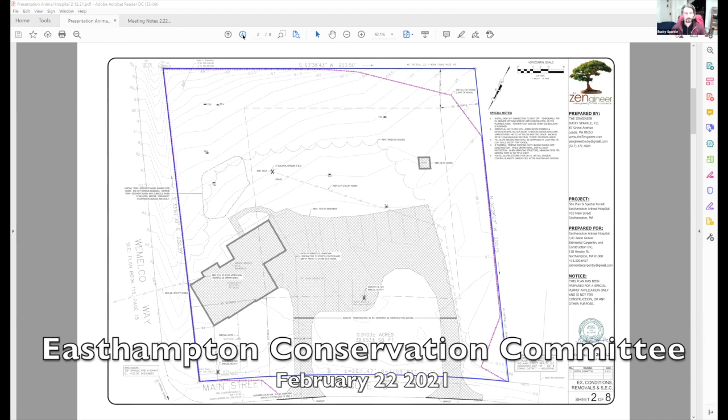There are a couple of stormwater structures. There's an existing structure here and an existing structure here that presumably tie into the municipal system. We are disconnecting those and tying everything into our stormwater management system. So those untreated discharges are being eliminated. And everything that's in the hatched shading is going to be removed from the site. So the old building is going to go once the new hospital's in place. And I'm going to move now to the proposed conditions site plan.

So obviously I put a little more coloring work into the proposed conditions, and the old hospital is gone. There'll be a new hospital about 3,300 square feet in the corner of the site. Strangely, north is to the bottom left corner on this drawing. That was not my convention, so I may just say top and left and right for simplicity, because everything will be northeast or southwest otherwise.

The new parking area, we are expanding the parking area. We're adding about 8,000 square feet of impervious area to the property. And it's all going to sheet flow to a low point right here. And that will then go through a rain guardian turret. So it's sort of like a curb inlet that has a sump and a screen and filter on it. It collects quite a bit of total suspended solids.

The company says 80%, but I looked at their documentation and I don't trust it over 60%. So I only qualified it as 60% TSS removal. We have a sediment forebay and then an overflow into the larger basin. Still not very big. These things are about 1.5 feet deep. The larger basin is also an infiltration basin now that we've done the pre-treatment. We also have an underdrain because the soils aren't particularly good through here. So I want to make sure that over time the forebay does drain out and we don't have standing water.

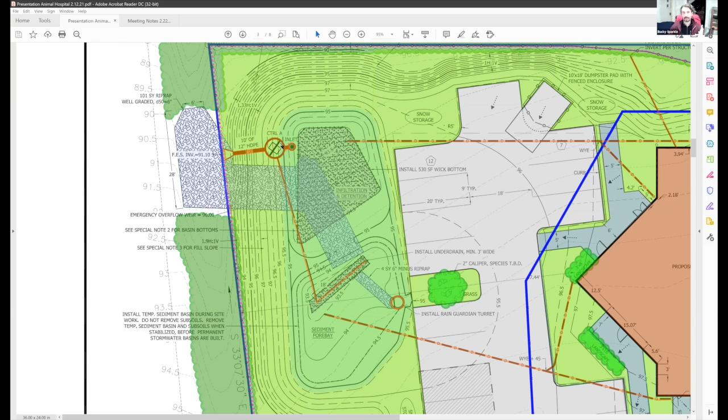So there's a lot more riprap in the area than would be necessary except for the emergency overflow. So we do have to have an emergency overflow situation, which is this wide, about 10-foot wide apron of riprap through here. So if for some reason the inlet were clogged and other inlets in the control structure were clogged, or water was coming in at a higher rate than the 100-year storm could discharge through the system, you might get an emergency overflow. So we have had to armor all of this area.

So this sort of rectangular section is just the emergency overflow. This section down here, still probably a little big due to the emergency overflow. We probably don't need quite that much just for a 12-inch pipe to discharge. But we do have to allow the flow rate coming out of here up to 6 cubic feet per second. We're staying under the 12 feet per second velocity, but we do need the energy dissipation as soon as possible so that it can continue to just run along the ditch in a natural state.

And logistically, who in the city, just because it's outside the property line and within the roadway right of way, who in the city authorizes that aspect of things? The comment I got from the city engineer was they didn't have a problem with it. Now, the answer to your question, I do not have exactly. The reality is it's public right of way, and all the water is going to be discharging there, whether or not the riprap is on our site or on the city. So that's something that perhaps we could get a little more clarity from the DPW on. They don't seem to be concerned with how that is laid out.

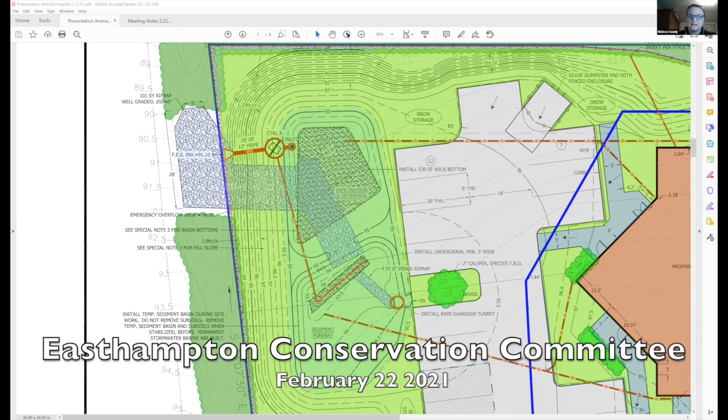Okay. You mentioned an increase of about 8,000 or so square feet of impervious area? Yes. What is the total limit of disturbance associated with construction? Because it looks like the tree line gets changed pretty significantly. Yes, it does. The whole site is just under 40,000 square feet, and we are necessarily clearing the majority of it. It's just the trees in the upper right quarter and in the bottom right quadrant that are remaining in place, as well as a patch of trees adjacent to the existing structure. So we are disturbing something like 36,000 square feet.

And other than loam and seed, is there any area with a revegetation plan to further stabilize it? Mostly just the grass for the disturbed areas. There's some landscape plantings, but that's not particularly important. We've got one tree in the parking lot. Is there something that the commission would like to see in particular? Not at this time, but I haven't really dug into the proposed plantings. I'm concerned about the extensive disturbance at the site, and then the short and long-term stabilization measures.

Okay, so it sounds like you're going to want something more specific on seed mixture. Is that what I'm hearing? I'm curious about that, yeah, and I don't know yet. I haven't scoured the drawings, so if it's in here, I just haven't found it. Well, in general, the light green area that is the bulk of this site is just scheduled for grass at this point. Simple maintenance. Also good for dogs to pee on. Okay, that's all I have at this time. I would like to open it up to other commission members.

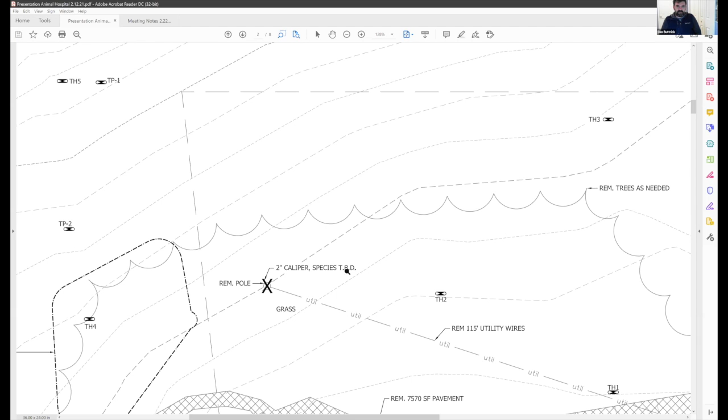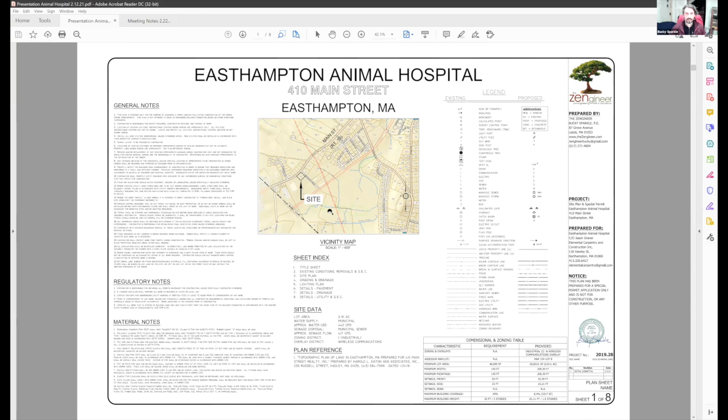Okay. Are there? I'm trying to remember. Are there any wetlands anywhere near? Obviously, there aren't right at the site, but... No, but the closest that I was able to find, let me jump up. I'll go to the locus plan here. If we look, the site is this rectangle, and here's the rail trail, and I have some graphics over here, but you can see whatever this water course is, there is wetland back here that drains under the rail trail right through here.

So this is all dry woods until around here, and so I can't tell you exactly where we're at. The site's about 200 by 200, so you can see we're perhaps 500 or 600 feet away from a wetland.

But Bucky, sorry to interrupt. Do you know what the dominant canopy in that forested area is, if you had to identify trees? I didn't really walk off site, to tell you the truth. So I'm not sure what I'm going to be looking at. I know on the south side of the rail trail, just because I used to live over here, is a huge amount of pine trees, except for where it's open and meadow. But I don't know that that's the case through here; this is the KC Small Firearms Facility. So I don't know what they have growing. Thank you.

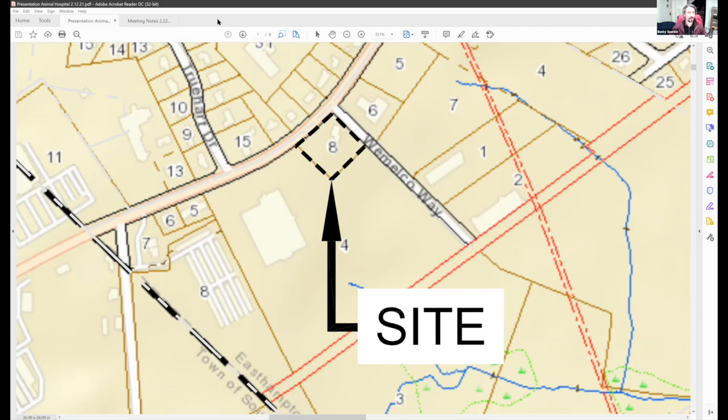Okay. So, what storm? So that sort of auxiliary overflow, emergency overflow, that's for big storms, obviously. But there'll be discharges through the outlet for most storm sizes. Do you want to do that? Yes. Yeah. Again. Okay. There has to be a minimum volume captured before there's a discharge. So let me go, let's see, try to figure out the best way to describe this. Whoops, it's got to go back.

See, I'm trying to not talk to my computer while I'm frustrated with it because I'm on a live meeting. So we have the overflow here at elevation 95, and the forebay is 93 and a half. So this has to fill up with 1.5 feet of water before anything is released to the infiltration basin. And then this inlet is raised here so as to provide a minimum amount of groundwater recharge, the way we need to calculate that.

So the question is, what's the smallest storm that will discharge water from the site? I'm not sure what the question is. Maybe. Yeah, I think that's what I'm asking. Okay, I'll have to get into my HydroCAD a little bit here to do that, because I know we are discharging at the 2-year storm. So see if the power of differential equations can help me out here. I know that a 1/2-inch storm discharges nothing from the site. And of course, most storm events are going to be in the 1/2-inch range. But let me see.

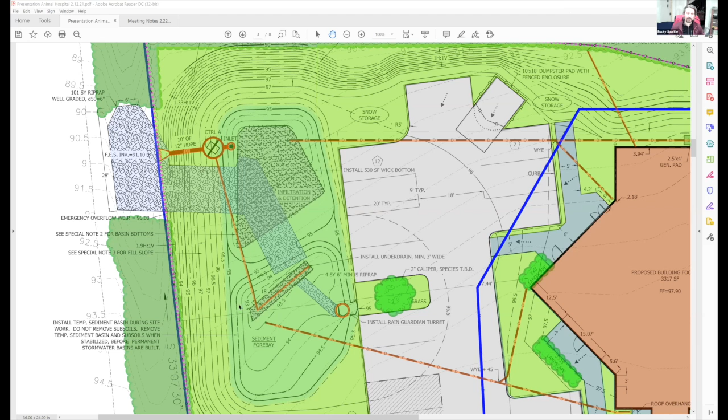So that component that stays in the forebay, that's not contributing to recharge. It's really whatever gets over into the main basin, the main part of the basin, that contributes to recharge. Partially, if the under drain section, I'm going to take you to the cross section of that. So I'm going to jump a few pages into the details. It's probably this page. Right, so here's this sort of under drain or wick outlet.

So the bottom 6 inches is open stone, and that has to be full before there's any discharge from the pipe. So for smaller storms, it's going to not even fill in 6 inches of stone and will eventually just leach into the ground. And I've ignored those values because they're pretty small, but there is that reality that small storms are going to end up going into the sand, into the stone, and then into the ground before there is any discharge through the wick outlet.

Okay, so I guess I'm wondering what storm size will result in flow into the main basin that then contributes to recharge, if that's a number you have. I can probably create this number here. I know a ½ inch is discharging nothing. 3 inches gives us a 2-year storm. So I'm gonna see what happens.

At 1 inch of rain, there's still no discharge from the system. 1½ inch of rain, we get 0.23 cubic feet per second comes out of the proposed system. So somewhere between 1 inch and 1.5 inches of rain before we start discharging in a 24-hour storm. So that inch of rain is going into the sediment forebay. Yes. And then some proportion of it is spilling over into the main basin and infiltrating there.

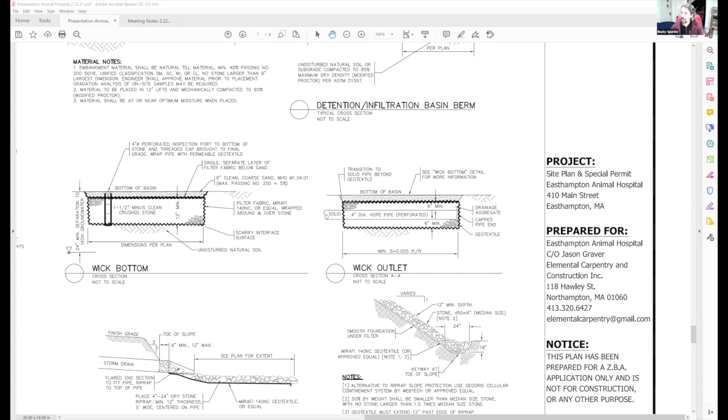Yes. But not all of it will infiltrate because some is going to go out the wick drain. And that is true. Yeah. So I guess that's what I'm wondering, what proportion of that actually infiltrates. I can tease that out of my model. That's not something I've ever been asked to do, but I can certainly come up with a reasonable answer on that. I guess I can model the wick as another infiltration basin, basically.

I guess what I'm saying is if we're expecting a certain amount of infiltration for a certain storm size, but then we're losing some of it through that under drain, if that's a negligible amount or is it 1% or is it 20% or something? I don't know. Oh, that's a reasonable question. And it's not beyond my capability to come up with an answer. I just can't tell you that in a meeting right now because it will take some time for me to model that. Yep. Okay.

I know that there's that 65% rule for capturing water. We're well over that in the recharge realm, but I'll come up with some answer on that. Okay. I mean, if you're complying, it's no big deal. But if it's close, I guess I'd like to just make sure that it's meeting the performance standard and all that. Yes.

Yeah, my worst case scenario, if for some reason I come up with a number that's too small for the wick under drain here, I can always just increase the footprint of that to a certain extent. I mean, we're building on a slope, but I can still work with that. Okay.

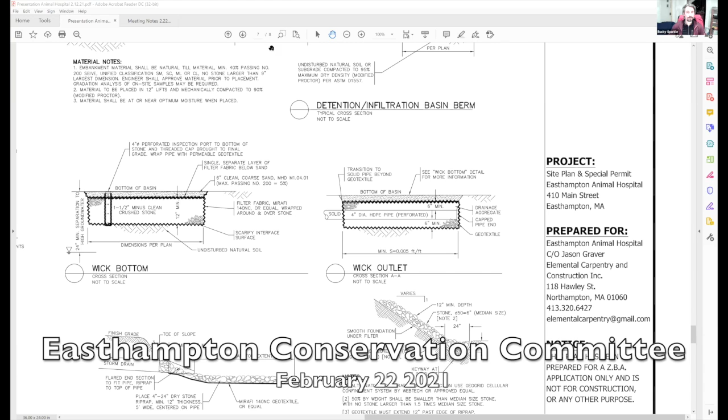Other questions? So the owner of the completed site, we think, will be also the entity that's building it now, right? So the operations and maintenance, everybody's going in with full knowledge of how it was designed and what the O&M intent is and that sort of thing. Yeah, the applicant is the owner and they will operate this facility. Excellent. Much easier way of saying what I was trying to ask. Okay, that's good.

And so you said drainage now goes out, presumed to the municipal stormwater system. Partly. Partly, yeah. And now it will all be going through the stormwater system, or some of it will go to the swale on Wemelco Way. So is it the Route 10 system or is there a drainage on Wemelco Way currently? No, it just turns into that wetland eventually.

Wemelco Way continues to descend all the way down to the rail trail. And when they built the railroad, there's a big culvert that they installed there to let the water go by, but they created a pretty good wetland back there. So that's where it's headed. Okay.

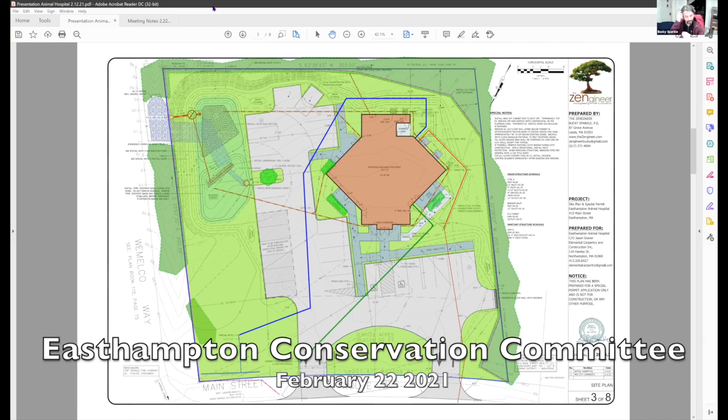There are buildings on the east side of Wemelco. I don't know where their stormwater goes, if they have any systems whatsoever. They're older, so I would imagine they don't. Yep.

Okay. I guess that's all my questions for now. I think I'm good. Thank you for the answers. Sounds like there's one or two things we could follow up with next time. Yep, I can find those answers. Okay. Are there any other questions from members of the commission?

No? Jay, Michael, Deborah? Not at this time? Okay, so we have a couple of outstanding items that we can hopefully address. Can I verify my list here for my homework? Please. One is find out from the DPW regarding how they feel about the riprap and any maintenance issues therein. That's in the public right of way.

Also come up with the species for the planting around here. Just by the nature of that question, I'm betting that we now pull out like a Berkshire conservation mix or something along those lines for some of the steeper areas of the site and maybe around the basin, something that's mowable but has some native species diversity. I think most of this, of course, is just going to be lawn.

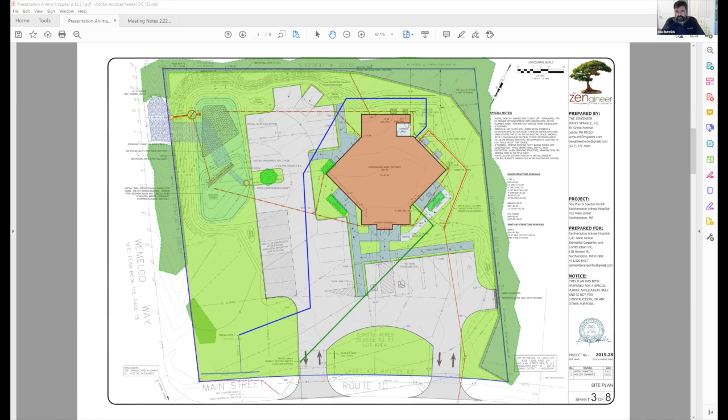All right, so those follow-up items, and I believe that means if there's no further discussion. Are there any comments from the public? I didn't receive any comments from the public, sorry. So with that, to allow time to address those outstanding items, is there a motion to continue to March 8th, 2021 at 6 p.m.? Motion to continue to March 8th at 6 p.m. Second. All right, all those in favor, roll call vote. August? Aye. Busa, absent. Buttrick? Aye. Ryan? Aye. Whittemore? Aye. Motion carries. We'll see you on the 8th.

Thank you. All right. Thank you very much. I'll get those answers for you. Have a good night. You too. Thank you.

All right, moving on. We have no requests for certificates of compliance. Enforcement actions. Are there any updates that you want to mention, Cassie? Yeah, yep. I got a request for the Lovefield Ferry Street intersection. They would have made a request to suspend their reporting due to site stability and lack of work. I was still on enforcement. Sorry. Oh my gosh, I'm so sorry. I just jumped right ahead. That's okay. That must mean there are no updates at this time, which is not surprising in the middle of winter. Everything is waiting until spring.

Okay. Open space updates. Oh yeah, so for Echodale, I had a meeting with Jeff today, which was good because he made a good note. Where we left off, we were trying to figure out the bidding process for the work. And he made a note that if the amount that we would need to pay is under $10,000, it may not require the bidding process. We may be able to just choose who would do that landscape work for us.